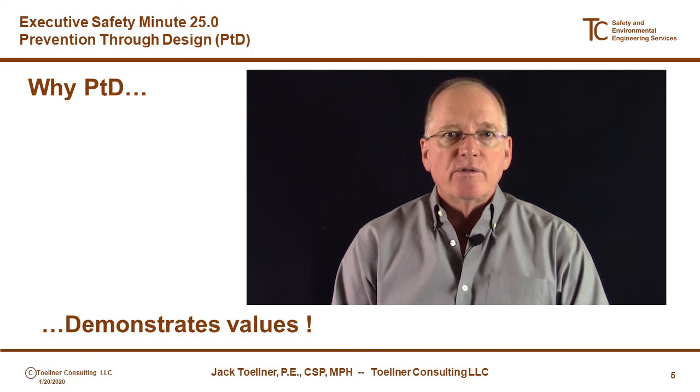Early in my journey as a safety professional, I learned about the hierarchy of controls. Managing risk to reduce exposures requires a strategy that can serve as a guide on how best to approach the challenge of risk reduction. This hierarchy of controls is a suggested strategy courtesy of NIOSH, the National Institute for Occupational Safety and Health.

This then begs the question: can we, during the design process, evaluate potential risks that may be present during the construction, operations, and maintenance phases of the facility, and then think of an alternate way of designing the facility or the construction execution process that results in a lower level of risk for those who will construct, operate, or maintain the facility? For example, rather than having someone make a welded connection at height, can we in our construction process have the weld made at ground level?

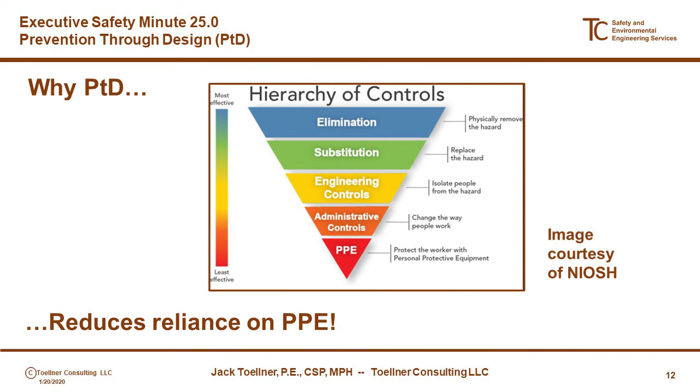A key fundamental in engineering and process design is our level of confidence that the proposed design or the proposed work execution process will deliver the desired outcome. Our clients want to understand from day one that the project can be executed on time, within budget, and consistent with design standards, and at a high level of safety.

If it appears that any of these parameters may not be achieved, then we are expected to influence the outcome such that they are achieved before the project is completed.

Experience has shown that our chance of success goes up the earlier we start in the schedule. Once we get behind, whether it be schedule, cost, quality, or safety, it is difficult and expensive to play catch-up. Influencing the final outcome is akin to an uphill battle, whereas when time goes by, the slight increase in grade turns into a hill that then turns into a mountain that then turns into a sheer cliff.

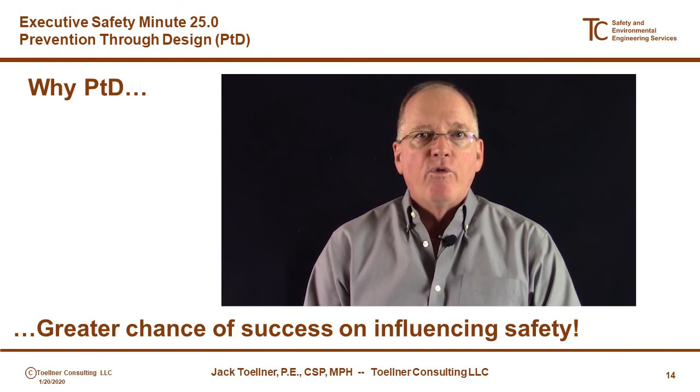So when someone asks me why prevention through design is important, my fourth response is that prevention through design can deliver a greater chance of success on influencing the safety outcome, and I always prefer the path with a greater chance of success if for no other reason than to avoid disappointment and/or failure.

Up until this point, we have primarily focused our discussion on prevention through design around safety, but the benefits of prevention through design go far beyond safety. Prevention through design is akin to a capital investment that brings dividends throughout the life of a facility. If we make it easier to operate and maintain up front, it will be less expensive to operate and maintain as time goes by.

So when someone asks me why prevention through design is important, my fifth response is that prevention through design is simply good business. Those things we do to improve safety usually have a positive impact on the other business parameters like quality, cost, schedule, and operability.

When someone asks me why prevention through design is important, I also note that it is one of those strategies that is never too late to start working on. Prevention through design is something we can work on starting with the conceptual stage all the way through the decommissioning stage.

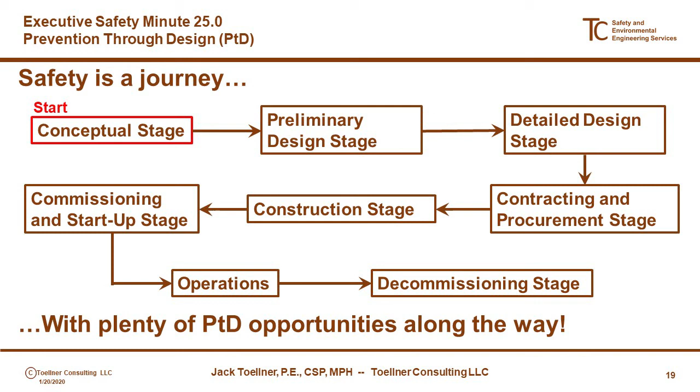Safety is a journey with plenty of prevention through design opportunities along the way. During the conceptual stage, we can establish goals and objectives that include prevention through design in the preliminary design and evaluation stage.

As we move into the preliminary design, we can leverage the hierarchy of controls and assess risk from the start, and then strive to eliminate hazards when possible or substitute less hazardous processes and embrace the concept of making it convenient to work safe.

I like to use the phrase 'making it convenient to work safe' because I believe it brings a different mindset to safety. Rather than just being driven to address hazards, making it convenient to work safe is proactive and reflective of the spirit that comes with prevention through design.

Here's a good example. In high-rise building construction, if we design the steel columns during the detailed design stage with holes at 21 inches and 42 inches above the floor, we make it convenient to install guardrail cables during the construction stage.

This practice has also proven to be cost-effective from both a material and time perspective. During the procurement stage, we can select equipment that not only meets the process design specifications, but also makes it easier for operators to operate the equipment. A simple example is installing larger hand wheels on valves, which reduces the physical strength required to close or open the valve.

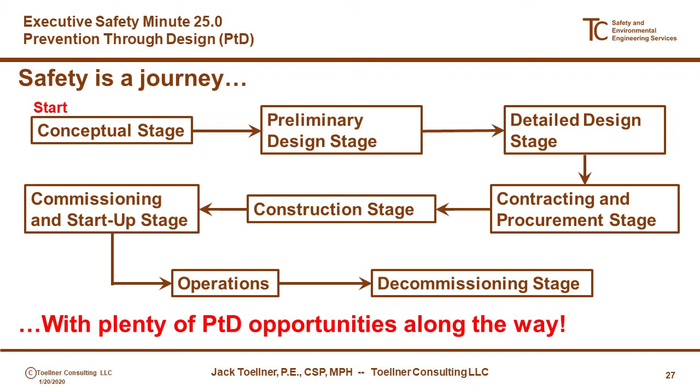I have noted earlier in this Executive Safety Minute, and in numerous other Executive Safety Minutes, that safety is a journey, and that every journey needs a journey plan. The prevention through design journey, like all the other journeys, needs a journey plan to serve as a starting point. Here's an example of such a journey plan for prevention through design.

While prevention through design is not about compliance with government regulations, it is wise to start our journey by asking the question: does the design or work practice comply with government regulations and standards? After all, being in compliance with the standards is a hurdle that is not optional.

Next, we consider whether industry best practices are being followed. Best practices usually represent how the better performers in a given industry plan and execute the work, and are always worthy of consideration. Best practices exist because others recognize that going beyond the expectations of the standards can provide added benefit in both safety and cost management.

My many years of experience have taught me that we have brilliant people out there in every aspect of the business. And if we ask them the right questions, they will present us with ideas on how to improve safety, quality, schedule, and cost management.

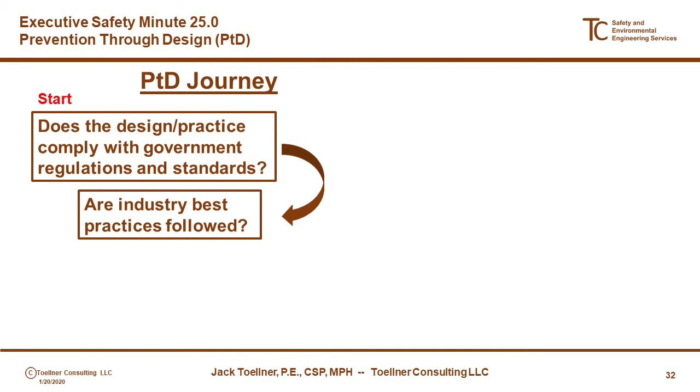Given that, the next reasonable step in the prevention through design journey is to test whether we have solicited new ideas from the designers, constructors, operations personnel, and maintenance personnel. Ask them the right questions in the right context, and they will give you some very valuable perspective.

Along with this, we should be soliciting lessons learned along the way. This is driven by the simple question as to whether there is a better, safer, or more efficient way to do this the next time.

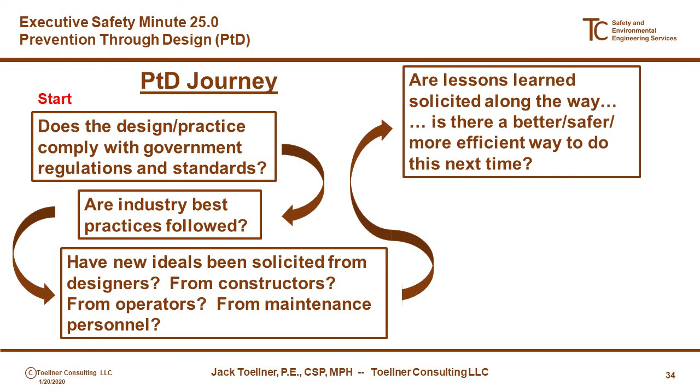Our lessons learned are only as good as our ability to capture, validate, and then reflect those learnings into our own management systems and processes. It is also worthwhile that we share with others in industry such that they too can benefit from those lessons we learned.

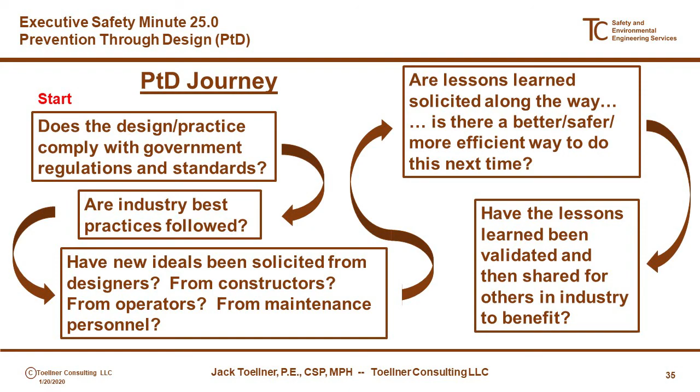As you go through the lessons learned process, you may want to double check whether they are truly lessons learned or lessons repeated. Lessons repeated warrant additional inspection as to why the lessons may not have been integrated into your standard work processes.

Executive Safety Minute 5.0 of this series addressed the topic of asking the right questions. We learned that if we ask the right questions at the right time and in the right context, it can help identify the next steps to improving safety. We even included a manager's guide to asking the right questions that can serve as a starting point for developing our own set of questions linked to the topic of prevention through design.

Following this slide, I'm going to share with you some sample questions you can share with your team as to how to better leverage the concept of prevention through design. The first time you ask these questions, you may not get much of a response or feedback. That's okay, if you recognize that any new concept we try to mature is simply a journey in itself.

If you don't get a response the first time you ask the question, then simply suggest that they give the question some thought, because if for any reason it is important to you, you plan to ask them the question again. Here's an example of questions I think we should be asking ourselves during the design phase.

What hazards are present? For example, do we have people working at height? Do we have the potential to expose people to high levels of energy, whether electrical or gas under pressure? Do we have simultaneous operations where work processes may conflict? If you have a team working on a platform and a team working below at ground level, ask: can the ground-level work be done at a different time?

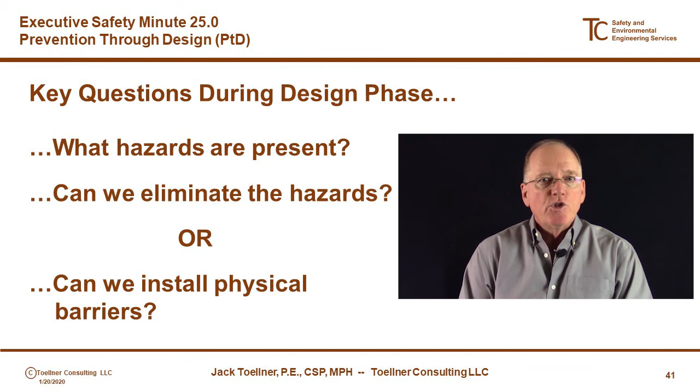If hazards are present, can we eliminate them? Can we perform the work at ground level versus working at height? Can we construct the facility in modular form that simply bolts together? If we can't eliminate the hazard, can we substitute something less hazardous? If not, can we install physical barriers? And if not physical barriers, could we change the way the work is executed?

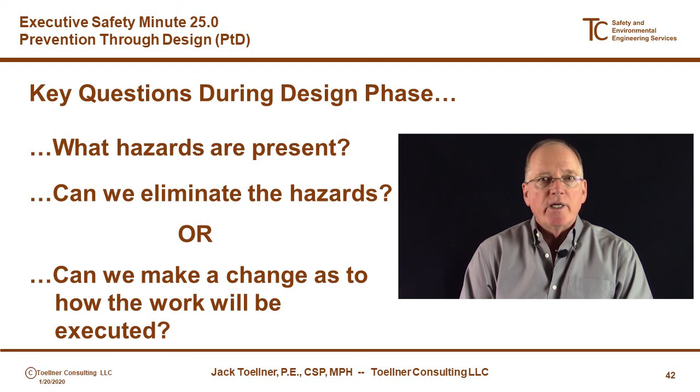All of these questions are consistent with the hierarchy of controls we presented earlier in this discussion.

Taking a different approach, we can ask: what can we do to make safety convenient? The previous example of designing steel columns with holes at 21 inches and 42 inches above the floor to accommodate guardrail cables during construction is a great example of making safety convenient. Building in walkways on roofs to accommodate future maintenance requirements is another example.

Asking how we make it easier from a constructability perspective is an important question. Two good examples linked to steel construction are using as few bolt sizes as possible and avoiding awkward or difficult to access connections.

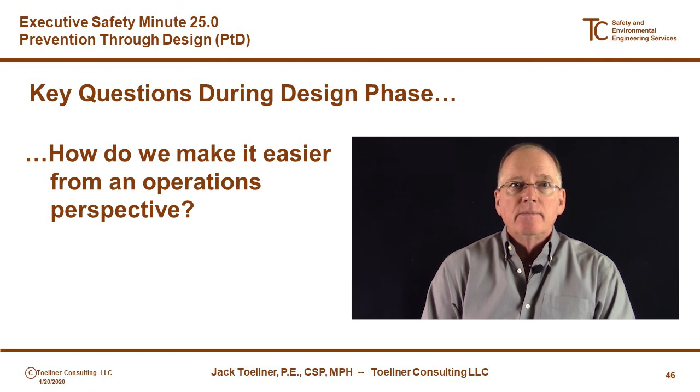We continue down this path and follow the question on constructability with: how can we design the facility such that it is easier to operate? And how can we make it easier to maintain?

During the design stage, we should also be asking questions in the context of checking the design against standards and industry best practices. What standards are we using as the basis of our design, and does our design meet the expectations of applicable standards?

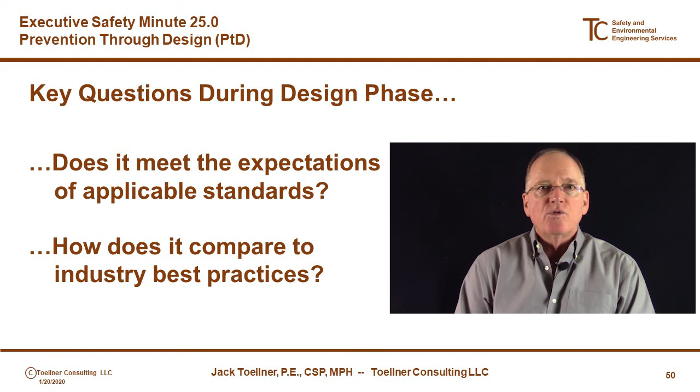Are there any gaps or shortcomings that you believe may exist in the standards? How does our design compare to industry best practices? And is there any way we can improve upon those best practices?

Rather than simply relying on standards and best practices to establish the minimum hurdle for safety, should we not challenge our design teams to apply critical thinking toward safer work execution processes? Why not open up the table for ideas by asking: if you were free to make any changes to improve safety, what changes would you make and why?

If you were personally going to construct or operate the facility, how would you design it differently, and why? Are there lessons learned from earlier designs that we should apply to this design? Recognizing that we never make changes in isolation, who should we vet these changes with?

My years of experience have solidified my belief that there are incredibly bright individuals working in construction, operations, and maintenance, representing a tremendous amount of intelligence and experience, with potential and ideas just waiting to be unleashed. It is important to seek out those individuals, build relationships with them, and include them in the discussion.

In regards to the potential of bright individuals being out there, let me share with you a very personal experience to make this point.

My father had a long history of heart disease. Over a 20-plus year period, starting at age 68, he had 7 stents placed in his arteries around his heart. He had a heart valve replacement and a bypass. He had both his carotid arteries sliced open and scraped clean, and then had a pacemaker installed. Given all these miracles of modern medicine, he lived to the age of 92 despite his heart disease.

During the first or second medical procedure, where they were going to install several stents in his arteries, I had the opportunity to meet with his heart surgeon. This surgeon had quite a reputation for being really good at what he did, and his bedside manner was impeccable.

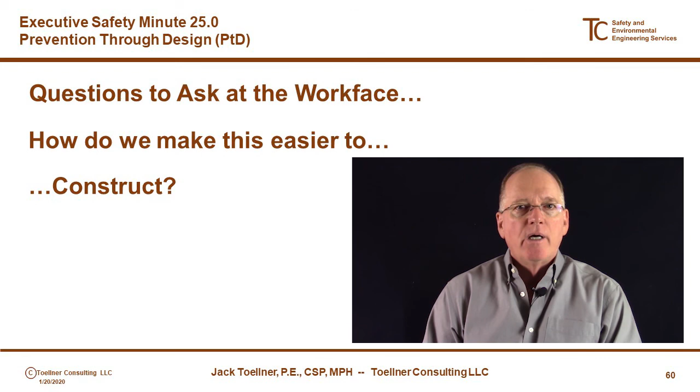The next question to ask is, how can we make this easier to construct, operate, maintain, and decommission? This builds upon the idea that if we make it easier to construct, operate, maintain, and decommission, then that too may benefit safety.

Early in my career in construction, I built myself a reputation by asking these questions and was richly rewarded with ideas that benefited both safety and business performance. It also earned me a lot of respect and initiated a lot of beneficial relationships and friendships.

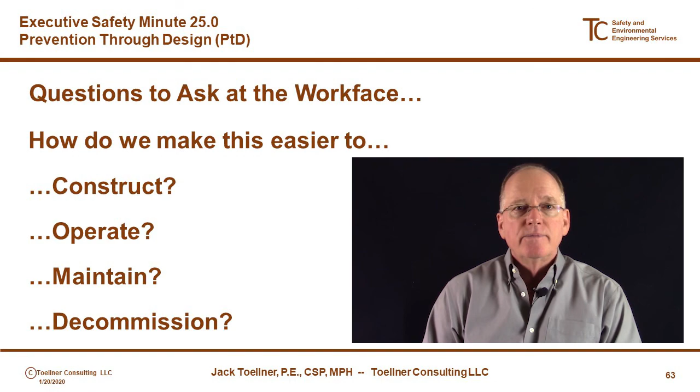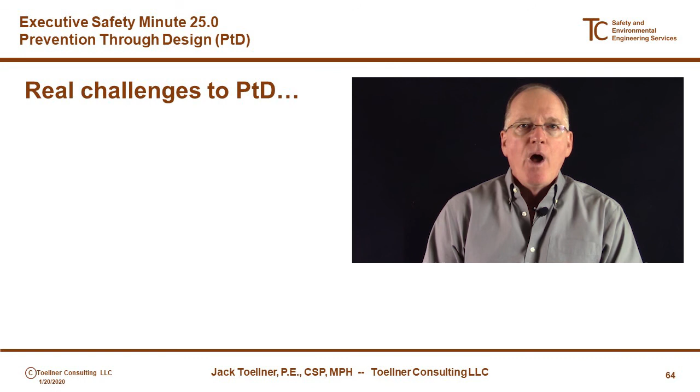To be successful in implementing a prevention through design program, we need to understand some of the historical and real challenges that come with implementing anything new. Quite often the challenge is a lack of a forward strategy, which is important because if we don't have a forward strategy, then by default, we are taking a potential hit-or-miss ad hoc approach, which then leads to ad hoc results, which although it could be successful, is not accompanied by a high level of confidence.

Another challenge is understanding and addressing potential disablers, which are those things that are holding us back. Quite often as a society, we focus on enablers, which is not a bad thing, but without addressing the disablers, our efforts to enable may be, at best, inefficient.

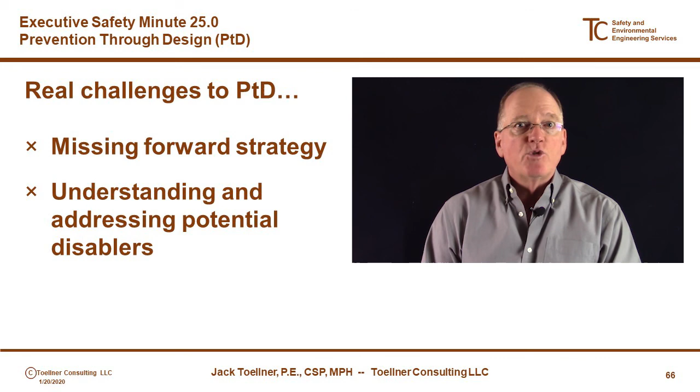A third observation on challenges to prevention through design is the perceived and sometimes real lack of available tools that can serve as a starting point. I'm going to address these three challenges in the next several slides.

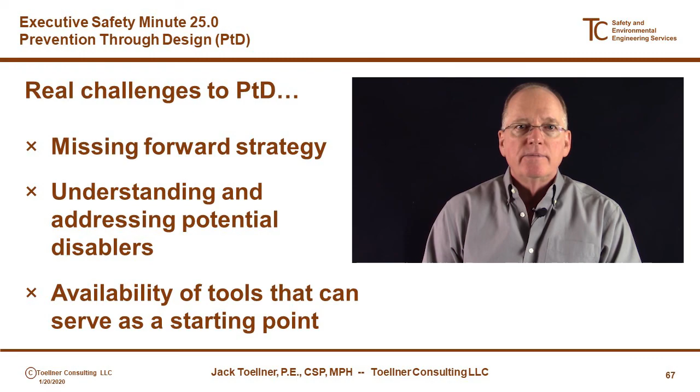Much of the Toellner Consulting Executive Safety Minute series focuses on and stresses the importance of having a forward strategy in place. This is important because without a strategy, the tactic you attempt to apply may not be effective and ultimately may prove to be a waste of resources.

Here's an example of a simple forward strategy.

We should start with establishing a value set and expectations for embracing prevention through design. A key to success is aiming high to start with, but not so high that it's impossible to achieve. Remember that it is a journey, and if we take on the journey in reasonable steps, we will increase our chance of success in completing the journey.

Also, if you aim low on establishing the value set and expectations, you will likely be successful in hitting low, which may ultimately be a complete miss.

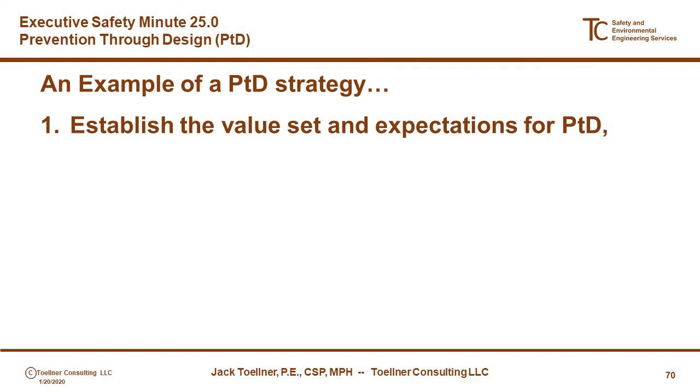We need to provide tools, time, and a process for prevention through design. The process does not need to be a perfect process from day one, but it does need to be flexible and supported with sufficient resources.

Involvement is important because you want the team to understand that this can be something they can do for themselves versus somebody else doing it for them. With involvement comes ownership, and with ownership comes an increased chance of success.

Because our management systems are only as good as the controls that come with them, we need to have a stewardship process in place. Are we doing what we say we're going to do within the management system plan? And if not, then why not? How are we going to hold ourselves accountable for delivering results?

A key part of our strategy is capturing and sharing lessons learned. How often are we going to reflect back on our execution plan and ask our team as to what went better than planned and why? Also, what did not go as well as we would have hoped and why? And is there something we could do different next time?

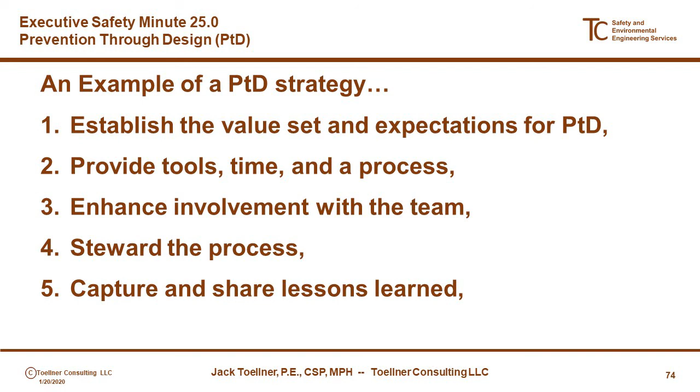For lessons learned to make a long-term difference, we have to roll those lessons into our standards and our operating procedures, and maybe even change out some existing tools for newer or more effective tools. In some instances, we may even discover that we need to simplify.

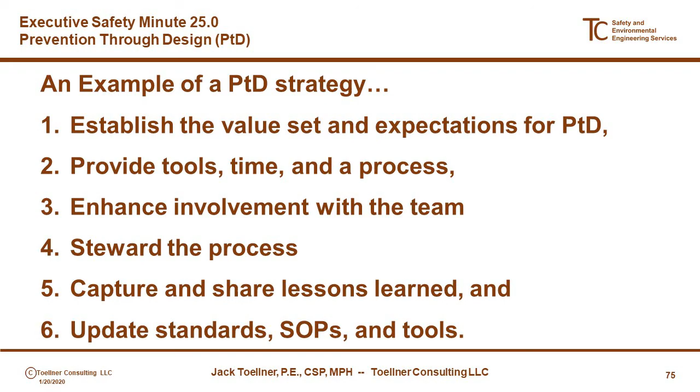As noted earlier, having a strategy is important because without a strategy, your journey may end up like taking a road trip without a map. There's no telling where you'll end up, and whether it ends up being a pleasurable journey or the journey from hell, the end destination at some point may be completely out of your hands without a strategy.

Executive Safety Minute 10.0 in this series addressed the topic of understanding disablers. While we live in a world that is constantly promoting enablers, and that's not a bad thing, sometimes we learn that even the best enablers may not be able to overcome the disablers that exist.

Disablers are like the proverbial ball and chain that is holding us back in our forward progress, and even though we have enablers presented to us, overcoming the disablers is still an uphill battle.

It is important that when we are not making the forward progress we would like, that we call a timeout and try to ascertain what disablers may be contributing to our uphill challenge.

Potential disablers may include a lack of vision, lack of motivation, and lack of leadership. If leadership and vision are missing, then it is unlikely that the team will be motivated. No surprise, there may be some resistance to change and a misperception as to extra or unnecessary cost. Some may not understand that prevention through design is an investment versus being an extra expense.

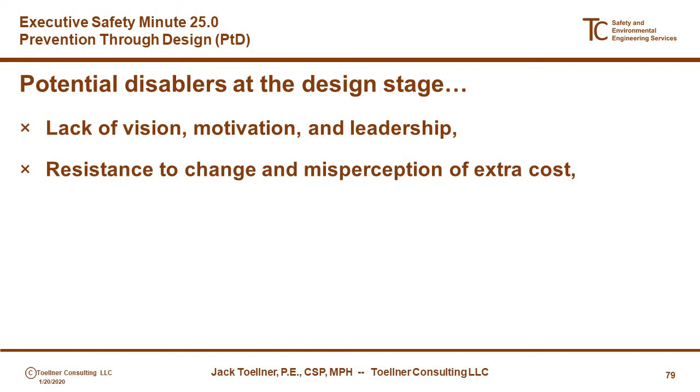Prevention through design is about solving the problem of eliminating or reducing exposures to hazards. But if the designers do not have a fundamental understanding of what hazards may be present, then how will they know what to address? Quite often, we take for granted that everyone can see the same hazards we see, but that's not always the case.

If the designers do not understand the hazards that may exist, then that in itself is a disabler that we need to address.

Prevention through design works best when there is interaction between the designers, constructors, operators, and maintenance personnel. A disabler may be that there is a lack of a process that brings these individuals to the same table from time to time.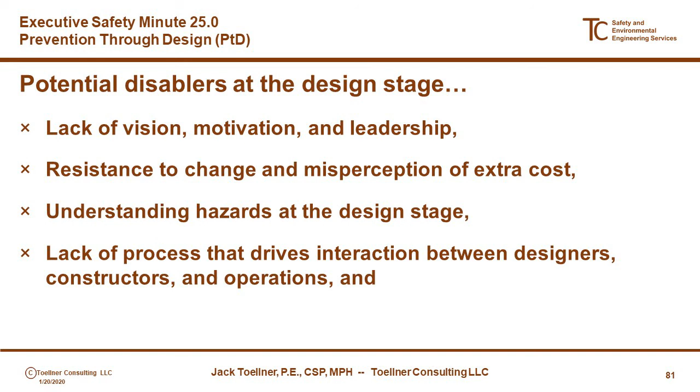Sometimes the disabler is that the right tools to facilitate and serve as a guide for critical thinking is missing. When OSHA rolled out the process safety standard, many in the industry learned that using a systematic, step-by-step process for evaluating process hazards was the key to success. Maybe a similar approach to prevention through design would be helpful.

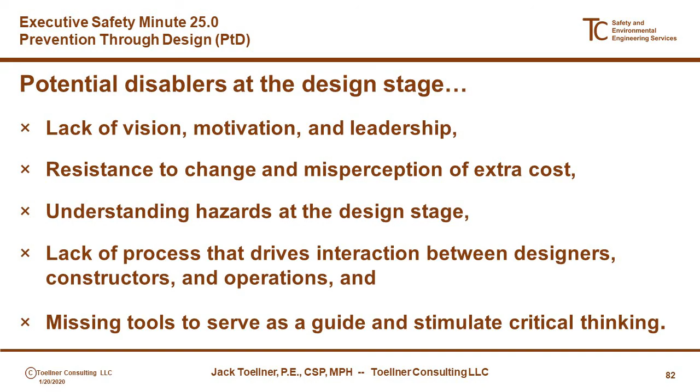Understanding and learning how to overcome potential disablers is really important for progressing the prevention through design journey in an efficient and effective manner. If you want to learn more about disablers and how to uncover them, please take a look at Executive Safety Minute 20.0, which addresses how to execute a cold eyes review.

A typical disabler, and an easy one to solve, is not recognizing that there are already many tools available to industry to help jumpstart their prevention through design effort. And I know for a fact that there are many trying to upgrade these tools to make them easier to access and be more effective.

It is important to understand that their success also depends on us in industry being willing to share our learnings and experiences for others to benefit. I have created this Executive Safety Minute at my own expense, and I'm willing to share it with industry at no cost because I believe that prevention through design is an opportunity to not only improve safety performance, but also improve every aspect of business performance.

Everyone benefits from the application of prevention through design. As you discover safer ways to execute the work, then please take the next step and share that with industry.

I can't say enough positive things about the Prevention Through Design initiative being undertaken by the Global Center for Safety at Arizona State University. Their vision is to establish a global center for safety that supports world-class education, research, and outreach programs focused on both prevention through design and the integration of safety and health into the core businesses of our organizations.

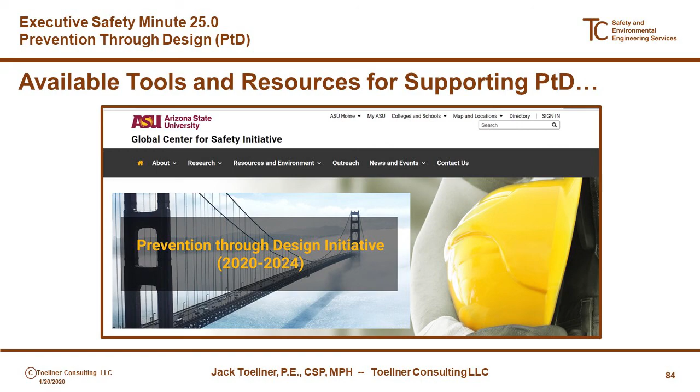The third resource that I want to share with you is the Construction Industry Institute website. CII is based at the University of Texas in Austin and is a consortium of more than 140 leading owner, engineering contractor, and supplier firms from both public and private arenas. These organizations have joined together to enhance the business effectiveness and sustainability of the capital facility lifecycle through CII research, related initiatives, and industry alliances.

Here's just one example of how CII is making a difference in changing how the world builds. This course explains the design for safety motivations, barriers, and enablers, the design for safety concepts as it applies to construction, how to address safety in the design process, and what resources and tools are available to design for safety.

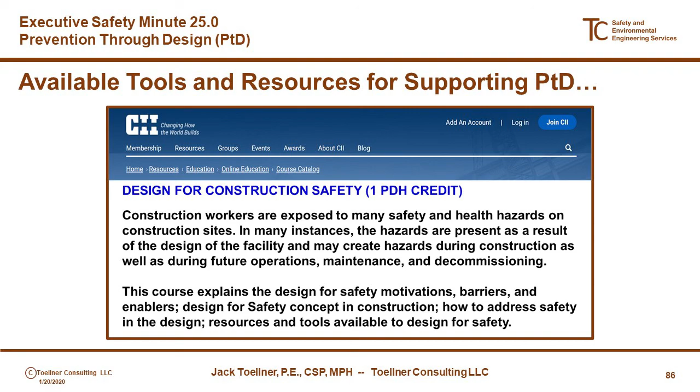In addition to this course on designing for construction safety, CII has courses on hazard recognition and communication, introduction to construction safety, partnering, and safety leading indicators. I was first exposed to the CII effort 20 plus years ago and recognized then that they are an incredible resource to our industry, and their contributions just continue to grow every year.

Another valuable resource linked to prevention through design is the American Society of Safety Professionals. The example shown here is an ANSI ASSP standard addressing how to avoid, eliminate, reduce, or control occupational safety and health hazards and risk during the design process.

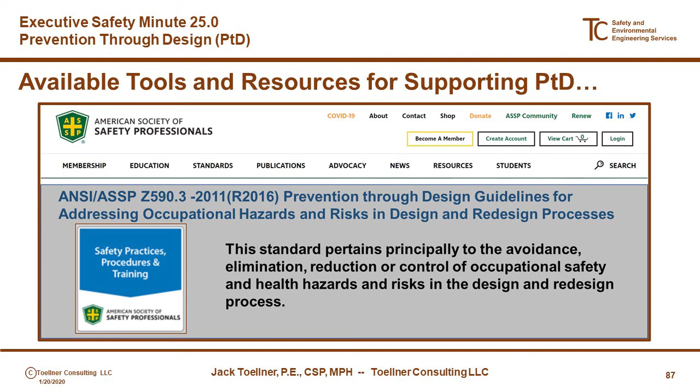In addition to several other standards and many technical articles addressing prevention through design, the American Society of Safety Professionals also provides an online course. The course is instructor-led, approximately 16 hours in length, delivered over a 4-week period. It serves as an excellent opportunity for gaining a foundation of understanding the application of prevention through design.

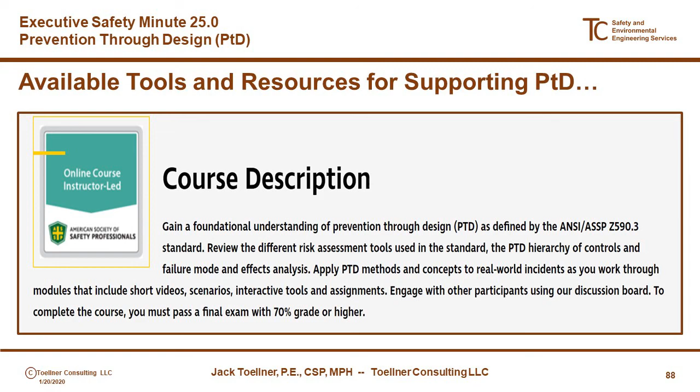To summarize this discussion on prevention through design, I think we have to start by recognizing that prevention through design is simply good for safety and good for business. I have observed tens of billions of dollars worth of heavy construction projects, and my observations have been that those projects that focused on prevention through design were not only the safest projects, but were also typically completed on time and within budget.

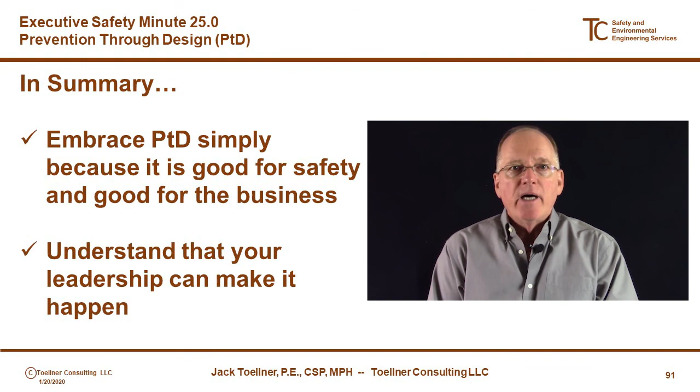I also observed that a conscious decision by the leadership team, versus just the safety professionals, to lead the effort increased the chance of success. Without a doubt, leadership can make it happen.

Prevention through design, like many other aspects of our business, can be a journey. The journey may come with detours and disappointments, but hey, that's not uncommon with many aspects of life and business, so please don't give up, and there is never a better time to start than now.

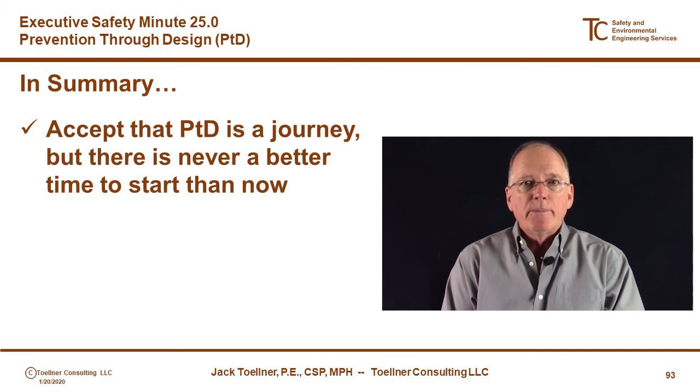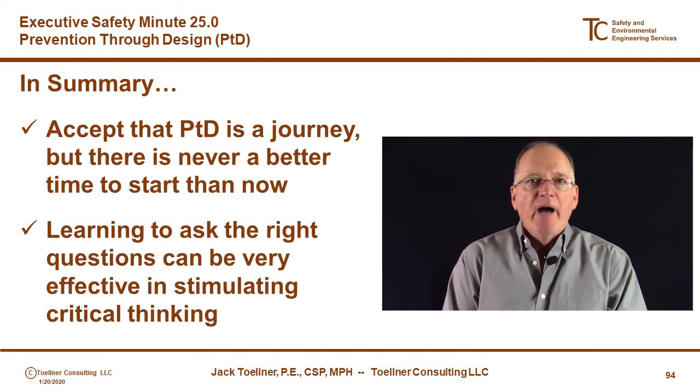For many years, I worked in an organization where the better performers managed the business by asking the right questions. And the best of the best not only ask the right questions, but they ask them in the right context, in the right tone. Leveraging context and tone many times stimulated critical thinking, which led to a better understanding of the problems, which then led to better solutions. I've seen that strategy work with prevention through design.

Speaking of strategy, without one, your plan may not be efficient nor effective. And without strategy, you may end up with ad hoc results which may prove to be disappointing. When you encounter that proverbial roadblock or bump in the road in your prevention through design journey, it is best to understand what disablers are holding you back. Quite often, the disablers are the real problems behind the obvious problems, and sometimes they're even the elephant in the room that nobody wants to talk about.

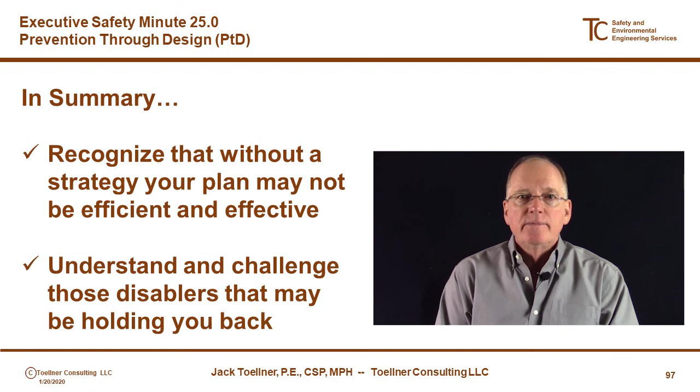It is always efficient to leverage your existing resources, which is not only the current tools out there that can serve as a starting point, but also the people familiar with how the work is executed. Those folks out there at the workplace not only understand what the problems are, but they quite often know the solutions to those problems. All we need to do is ask them the right questions in the right context and tone.

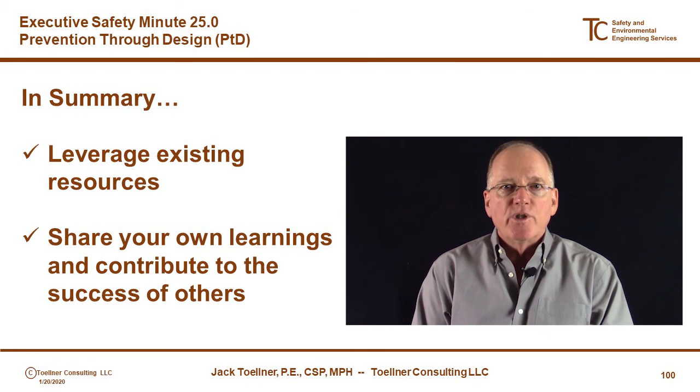And finally, we all benefit by sharing our learnings to help others within our own business relationships, and those outside those relationships as well. I've asked the question many times in the past, when we were going through lessons learned reviews, as to how many of these lessons learned were actually lessons repeated, which ultimately reflects a failure in our management systems. It is important that we not just seek out lessons learned, but integrate those lessons into our standards and operating procedures so we don't have to repeat those lessons.

I will close out this discussion with a simple question that you can take with you back to your organization. We live in a world that sometimes challenges us with the notion that most new things in how we do our business are going to be an uphill battle. I've always had a notion that although it may seem like an uphill battle, the crest may very well be around the next corner, at which point it may level off or even change to a downhill slope. Given that thought of optimism, why not continue the challenge and push forward?

The question I want to leave you with is this: how is your team going to progress their journey on prevention through design, and how are they going to share their learnings and experiences so others may benefit as well?

Now I will open up the floor for any closing observations or questions you may have on prevention through design.